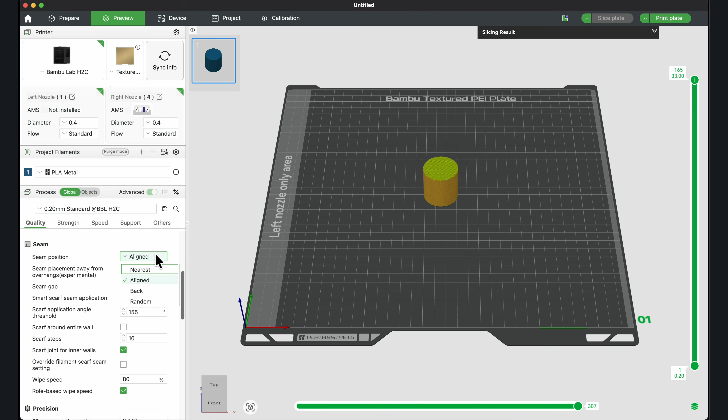A seam is the point where each printed layer begins and ends. On smooth surfaces, this often appears as a vertical line, or a series of small bumps running up the model. Once you understand where seams form, you can begin controlling where they appear.

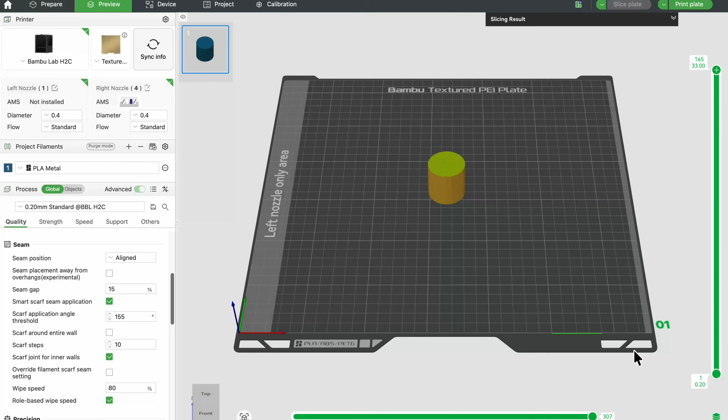The first step to hiding seams is choosing the right seam placement strategy, based on the geometry of your model. Nearest seam placement prioritizes nearby edges and corners. For mechanical parts, this often hides the seam naturally, because corners already break the surface of the model.

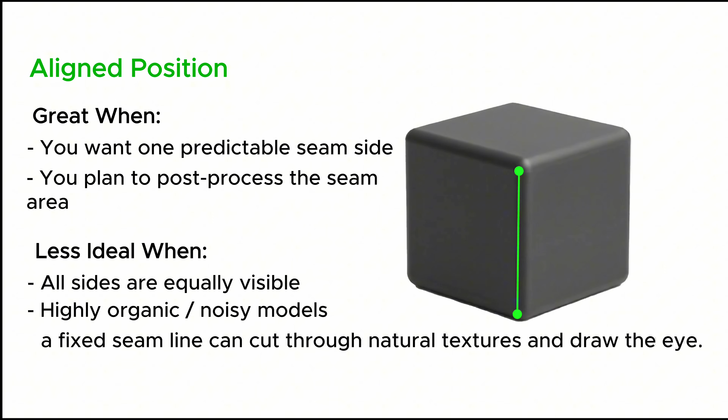Aligned picks the point that is closest to the start point of the previous layer. So each new layer starts exactly where the last one started, which you can move to a less visible side by rotating the model or using seam painting.

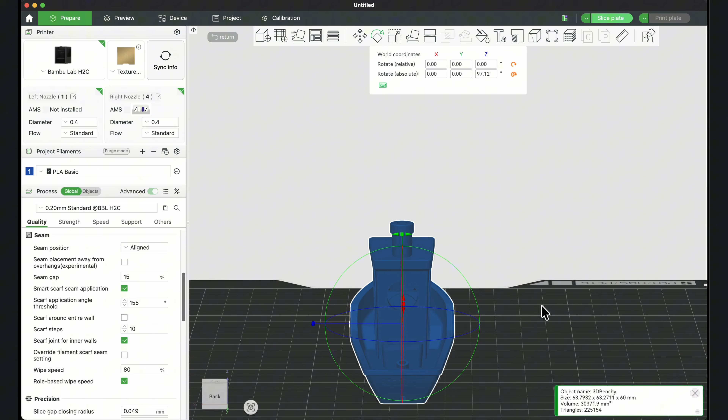Seam painting gives you direct control over where seams are placed on your model. If automatic seam placement doesn't give you the result you want, seam painting allows you to manually define seam regions on the model surface. For a clean and consistent seam line, you can enable vertical mode in the seam painting tool.

This allows you to draw a perfectly straight seam path with a single stroke from top to bottom without needing multiple passes. Seams are still part of the printing process, but with seam painting, you decide where they belong.

For display models such as figurines or decorative objects, the back option places seams relative to the viewing direction. By rotating the model in the viewport, the seam can be positioned on the least visible side.

On organic or highly textured surfaces, random seam placement can often produce a cleaner result. Instead of forming one continuous seam line, seams are scattered across the surface, where they blend naturally into the texture.

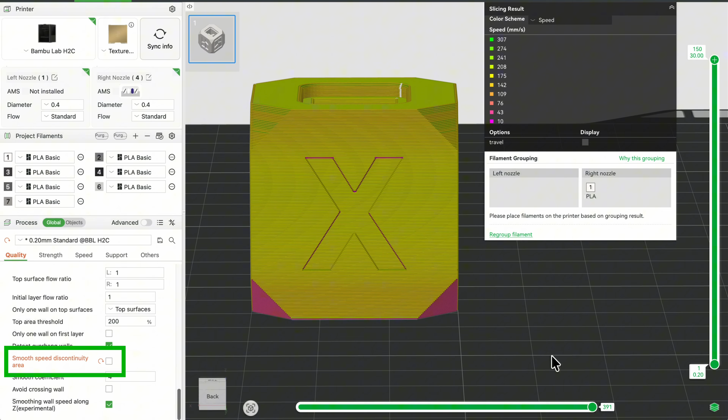Once seam placement is under control, a few advanced settings can further improve seam quality. One important setting is smooth speed discontinuity. This gradually adjusts print speed around corners and seam transitions, reducing sudden pressure changes that can create small blobs or bumps at the seam.

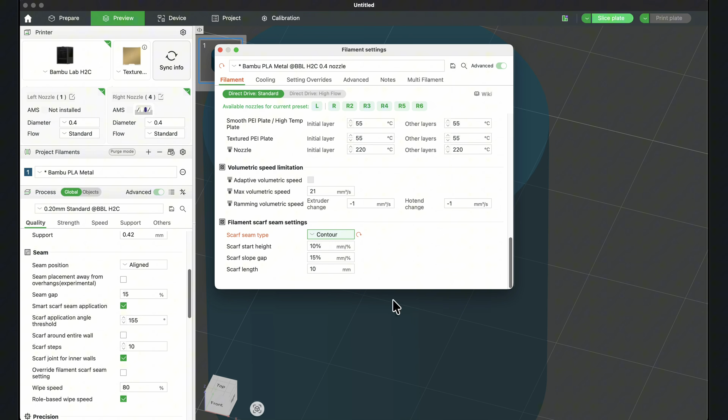For smooth curved surfaces, scarf seams provide an advanced technique for blending seam transitions. Instead of stopping and starting extrusion at a single point, the seam gradually overlaps the wall, making the transition much harder to notice.

Different seam strategies work best, depending on the geometry of the model. Seams are unavoidable in most prints, but with the right placement strategy and a few advanced settings, you can control where they appear and how visible they become. Instead of fighting seams, you simply guide them into places where they quietly disappear. And that's the essence of seam control.